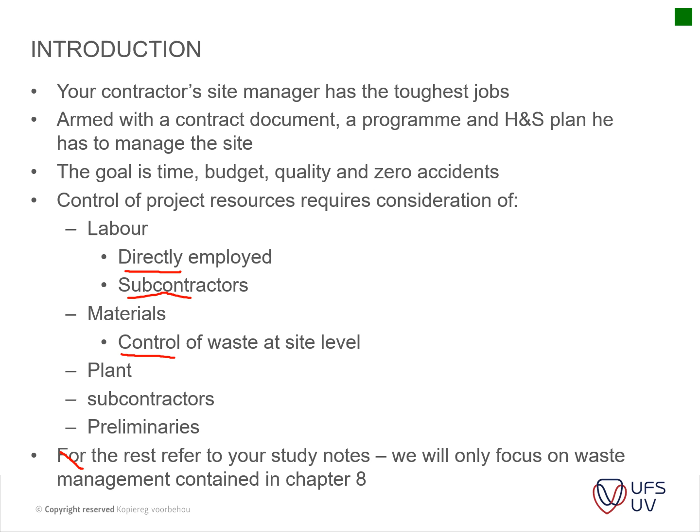So this is this little thing which I said which crept in. So please just ignore that. Yesterday when I updated the notes, I saw that this was in. So that's just something that crept in.

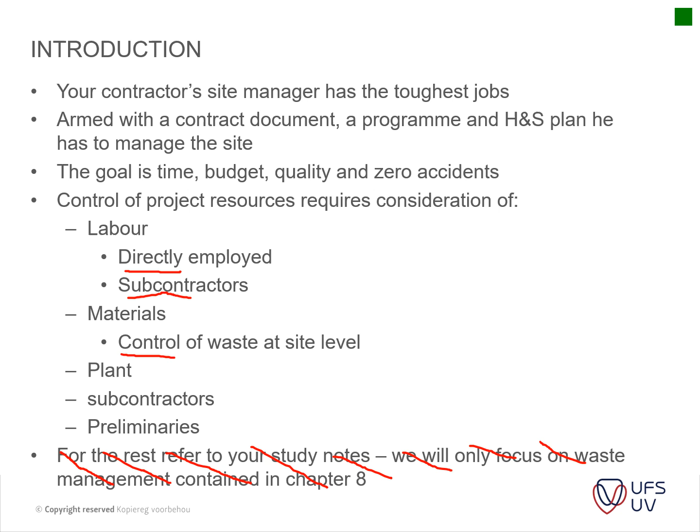Okay, so labor control. Like I said, you can either have directly employed labor or you can have self-employed labor. In South Africa, it's not really self-employed labor, I think we've got a different term. We usually use labor-only contractors, guys that specialize in labor, which has the necessary insurance and have their medicals updated.

UIF and all those items they look at, because you can imagine if you've got one or two projects and you suddenly have 100 people that you need to appoint, and then what do you do with them once the project is done? So that's where the labor only comes in.

But your directly employed labor is usually the contractor, contractors like shop fitters and so on. They have specialized guys that do the work for them. For instance, that tender briefing we went to, like tilers, plasterers, many of the contractors will have that type of core staff on their list, the artisans and bricklayers or so.

And what they might do is get a couple of casuals or people for that specific project to assist those artisans, guys that carry the bricks up to them or so. It depends on the size of the contractor as well, and the location. For instance, if you're a contractor in Joburg and you get appointed here in Bloemfontein, you might appoint a bricklayer from Bloemfontein just for the project, or a labor-only contract for that.

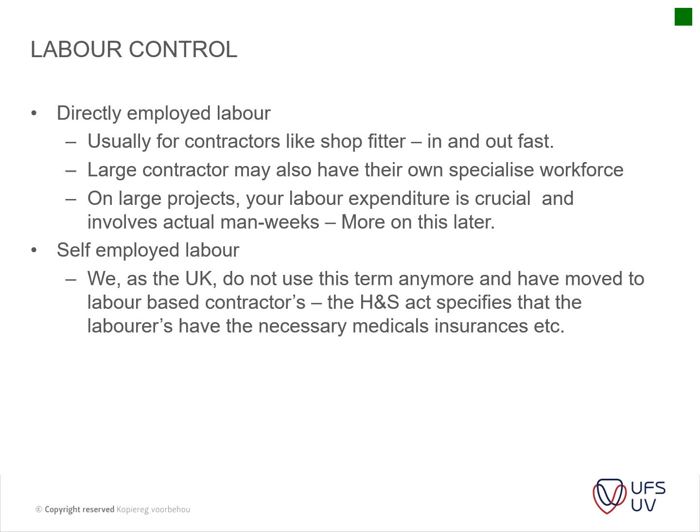So please note that. Then self-employed labor - in the book, as the UK does, we do not use that term anymore and have moved to labor-based contractors, like I said earlier.

Okay, so resource histograms - this you did in PPM, so I'm not going to go into too much depth of how your labor histograms work. But there's an example in this book that I might post as a mini task for you guys to do. Don't worry, I won't do it now. I'll just check with you guys when you have a bit of time.

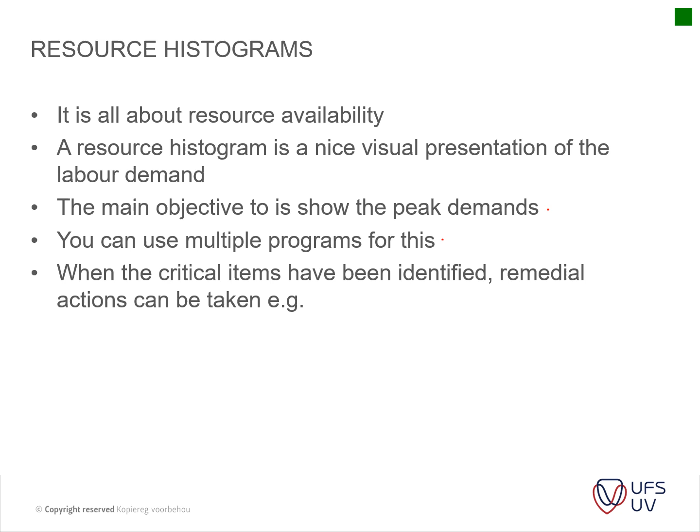Okay, so this one you'll probably recognize. This is from PPM from third year. I don't know if it looks familiar. It's a very simple histogram. So it's a simple project where you have excavations, bedding, lay pipes, manhole excavations, manhole construction, install valves, backfill, test and commissioning. So it's a very simple little project.

But this is now your labor only histogram. Okay, so you need 2 laborers in your teams that you can put on for trench excavation. So you've got 2 people that can work simultaneously in the trench. Your bedding, you can put in 4 people to work on that, and it takes them about 1 day.

And then you've got your manhole excavations. You need about this amount of people. Laying of pipes, you need 3 people to do that. And then you've got your manhole construction where you need 6 people, and so forth. Okay, so all it does is this is done on an Excel spreadsheet, and then you just add up the amount of people that you need per day.

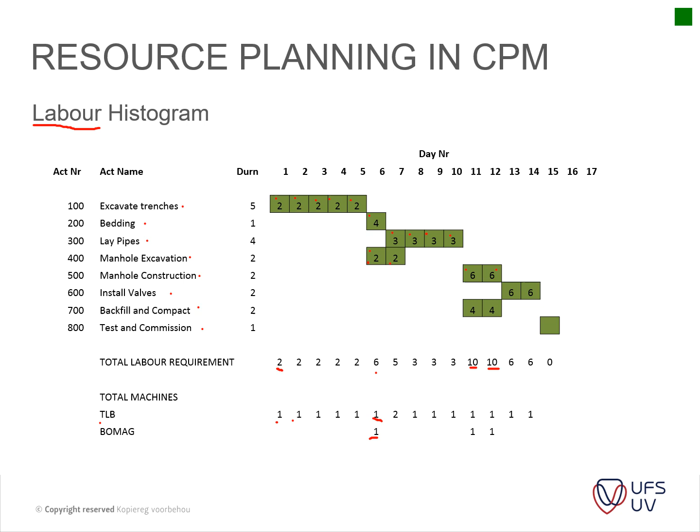Okay, so on your labor histogram you can see we've got these 2 extremities here, but we know we only have 8 laborers available, so there's already too many laborers on that day, so you can see you need to do a resource leveling there.

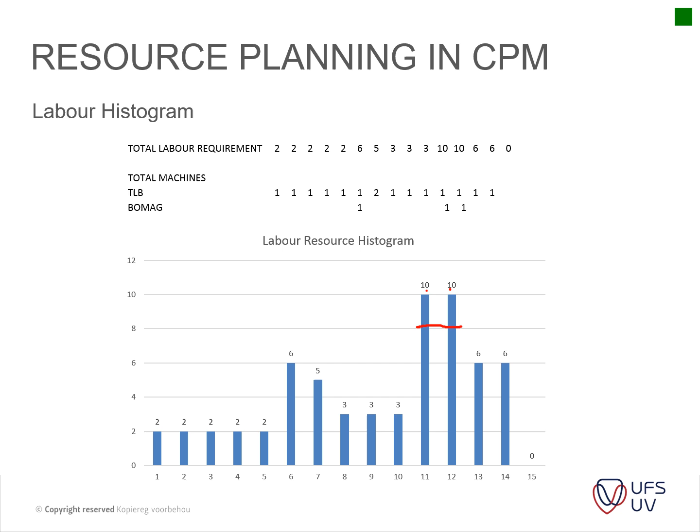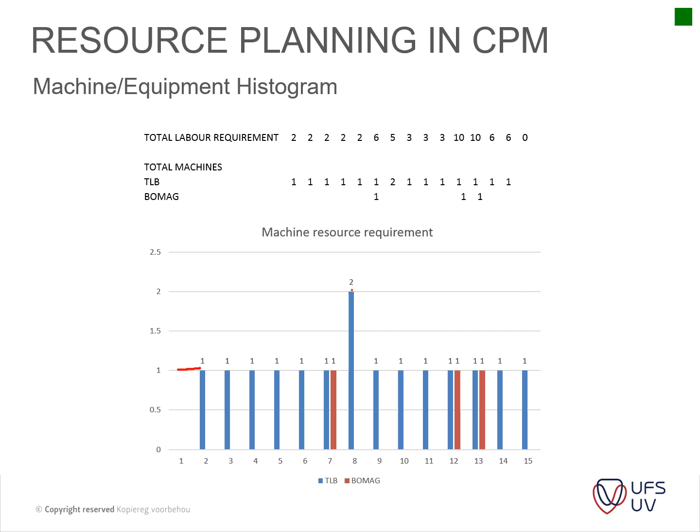Okay, then with regard to the TLB, the same applies. You add it up, and you can see on which days you need what amount of machinery, and you can see on day 8 you actually need 2 TLBs, but you only have 1 available. Okay, so you can easily identify where you don't have enough resources.

Okay, and then the simple solution, without going into too much depth, is you just level out your resources and your TLBs. What it causes, I think it's the pipe laying, that just moves out one day, together with your excavations, which moves the project by 1 day if you level it to 1, and if you level your laborers to 8, like there.

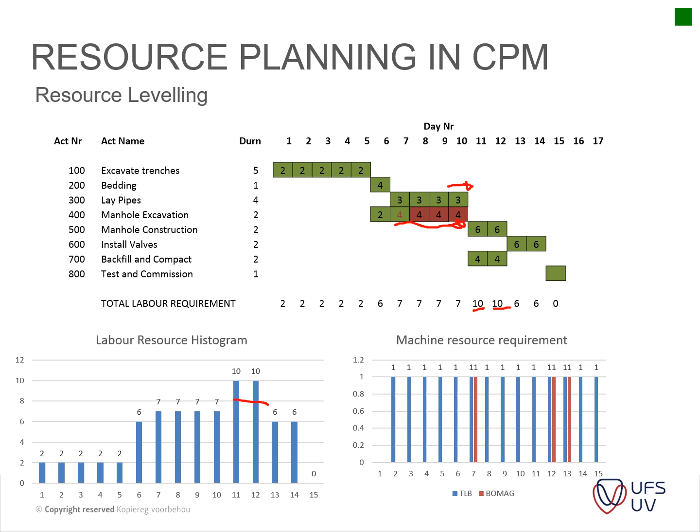I just want to see why it's still adding that up. Okay, so that's just a bit of a recap of how histograms work. And going further in materials control, that is on page 401.

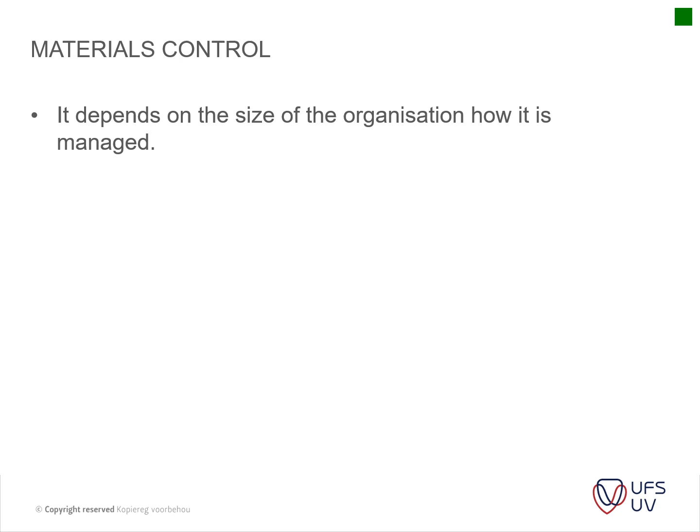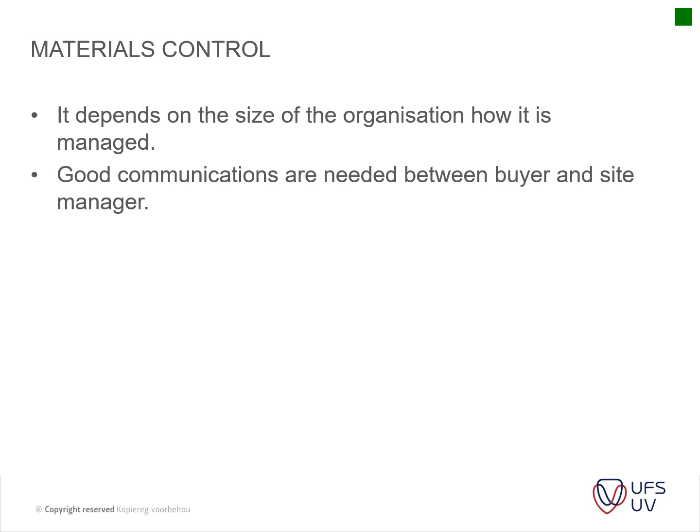Okay, it depends on the size of the organization how materials are managed, whether you've got a buyer, a central buying division, or if one person does everything. Good communications are needed between buyers and site personnel. That's very crucial. And then the responsibilities have to be clearly defined. Once on site, it's the responsibility of the construction manager to coordinate the communication. So that's something important to note.

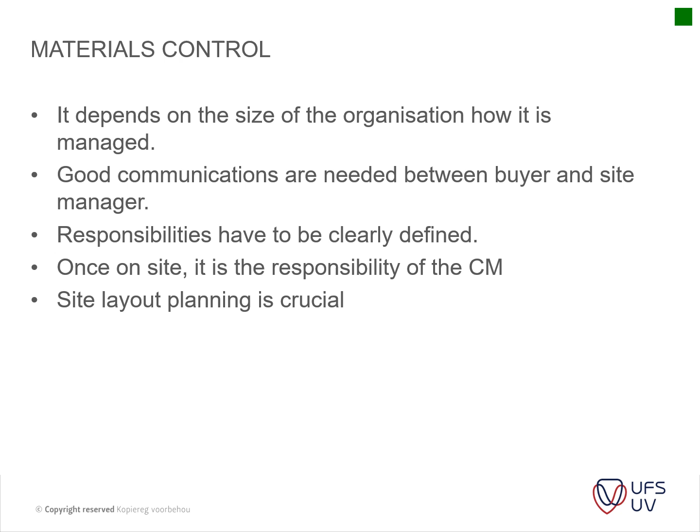And then site layout planning is crucial. That's where you're going to put your plant, where you're going to store your materials. And I think it's one of my next slides. If your housekeeping on site is done well, if you come onto a site and you see everything is nice and neat, you know they're managing their materials well. If you come onto site and you're falling over debris and bricks, broken bricks and so on, you know that they're not managing their materials very well.

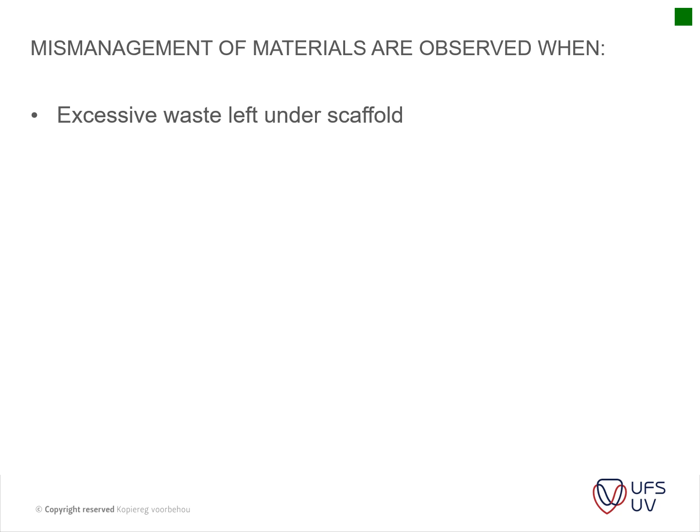Okay, excessive waste left under scaffolding. Here's actually the items which you can see. This is just a few examples. What you can see is excessive waste under scaffold, face brick bulldozed underground, material being stored on uneven ground, pallets of bricks unloaded on unprepared ground. This is supposed to be on.

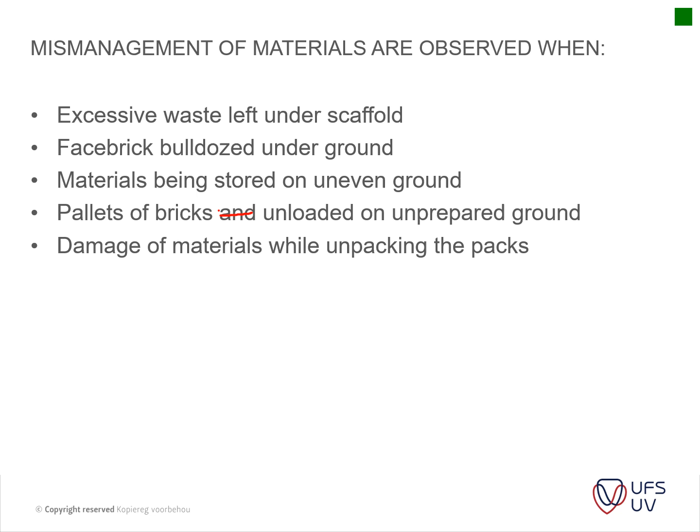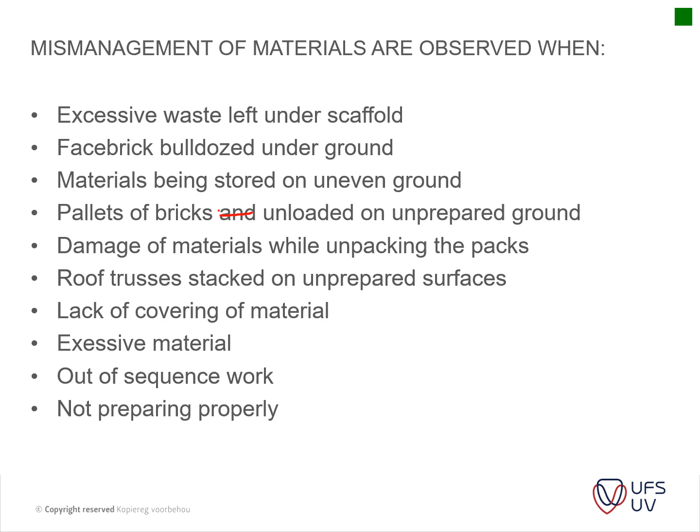Okay, and then damage of materials while unpacking the packs, roof trusses stacked on unprepared surfaces, lack of covering of material, excessive material, out of sequence work, not preparing properly. So you can easily see when a site is not properly run, especially towards managing of materials. Okay, then

something which embroiders on that is waste. Historically, material waste was only a percentage on top of your rates, but these days those percentages, if you're working on large projects, can be a lot of money in your pocket or a lot of money lost. So it is something that you need to manage very well. New thinking suggests seeing it as a resource. The industry can benefit environmentally, on performance and the bottom line.

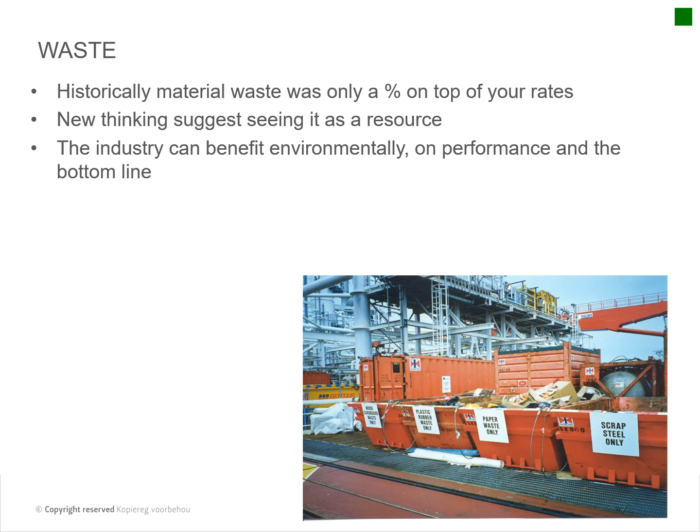Demolitions amount to about 100 million tons per year. That's now in the UK, so it's quite a lot. And then waste removal accounts for 4.5% of the company's profit. So just to put it into perspective, 4.5% is quite a lot. If you're working on a million rands worth of project, that's more or less 45,000 rand, which you could have saved or put into your pocket. So yeah, it's a lot of money.

Then approximately 13% of all material delivered to site is wasted. That's quite a staggering amount. And that's just the waste of material. There's other items which you can manage well as well, like your site offices. If you manage your tools and sheds and so on efficiently, the less containers you have on site, the less your overheads per day. So that's the stuff that you can think about.

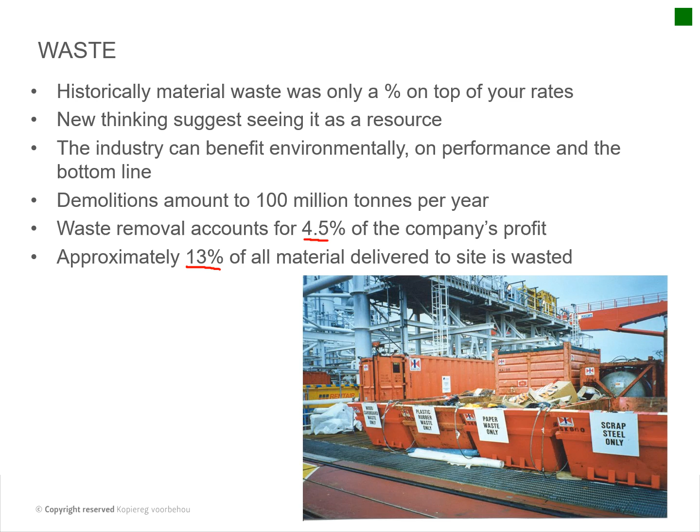The other thing is if you plan your site such that you use some of your originally constructed building to be used as storage, you can save that cost as well. So there's a whole lot of practical items that you can think of to save money by utilizing your progress on site and just being effective.

Okay, duty of care: construction and demolition waste streams have been prioritized by the environmental agency. So basically once you've demolished something, you need to get it off site. You need to plan for it. That's the short and long of it. You can't just demolish something and not have a plan of how to clean your site. Waste streams should be managed safely and without risk to human health. Okay, and then the waste may consist of metals, asphalt, tar, concrete, brick, tiles, etc.

Okay, and there's actually money to be made out of some of these demolitions. Sometimes you can sell your hard, or some of your, I can't remember what it is in English now, but some of your demolitions you can use for fill in other areas. If you've got a contractor that has a lot of fill to do and you can use that demolition work there, then you can actually sell it to them. So remember that, don't just pay money and go and dump it at the nearest site. You can actually save or make money from that.

Like for instance, your tar waste you can reuse for other applications also. I know in Kuruman they use tar sections because of the asbestos there on some of the gravel roads. They just use some of the excess bitumen and they actually made a little layer on some of those areas to rehabilitate it, so that the dust doesn't fly up. So that was one of the items that you can use that for, for instance.

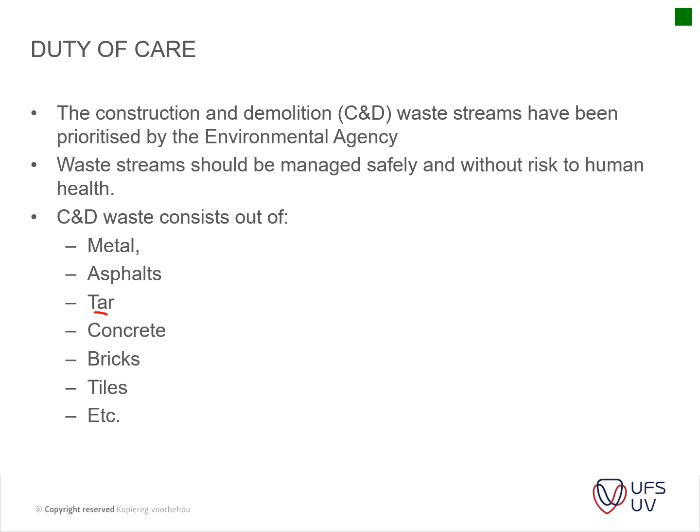Okay, duty of care. Construction and demolition waste is normally classified as commercial or industrial waste. Hazardous waste, which requires pre-consignment, is for instance your asbestos, chemicals, oils, contaminated soils, and so on. I've worked on one project where we had to take off asbestos. It's a schlep. There's only like four contractors in the country that do it, so it's highly specialized work, and they usually ask a lot of money for it.

So as soon as you're doing pricing on a project and you see there's asbestos, immediately start asking questions: is there enough money allowed for it? Identify it as a risk whenever you're pricing your documents also. Okay, then we have a legal duty of care. If we know that we're going to work with asbestos, the other risk is exposing your laborers to that.

It might not be that your personnel picks up a little strand of asbestos on that specific site, but five years down the line he gets asbestosis, and he says, oh, I worked on that project, that's probably where I got it, even though he might have got it from somewhere else. So just see it in that light. You've got a duty of care to actually look after your personnel's health.

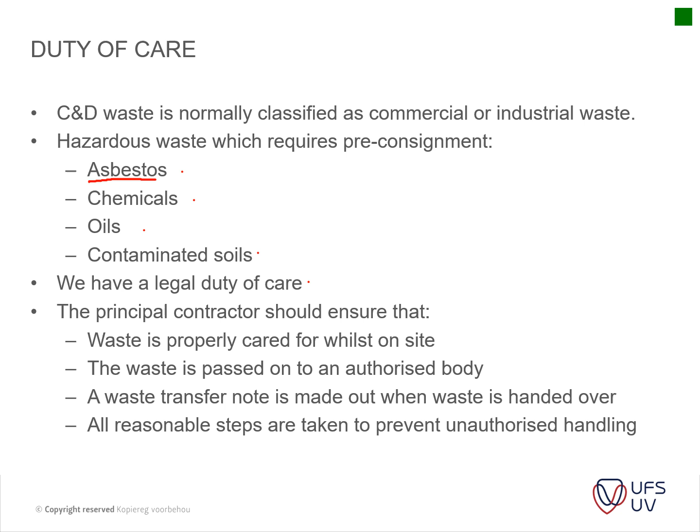Okay, then the principal contractor should ensure that waste is properly cared for whilst on site. Waste is passed on to an authorized body. A waste transfer note is to be made out when waste is handed over. All reasonable steps are taken to prevent unauthorized handling.

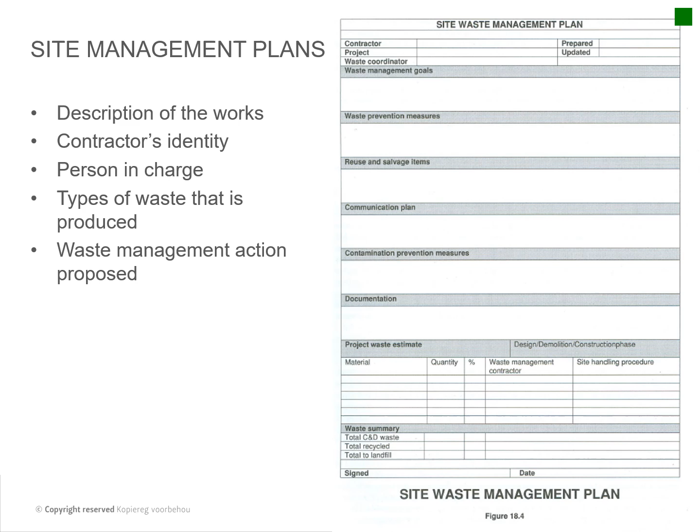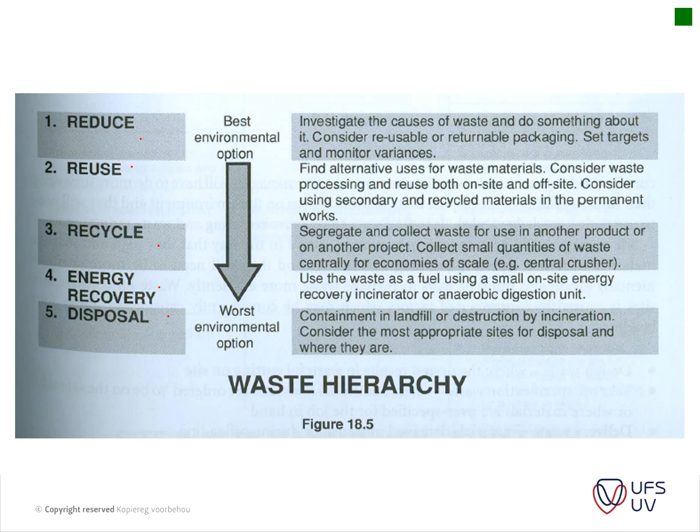Okay, site management plan. Here's a nice example that you guys can use. It's description of the works, contractor's identity, person in charge, type of waste that is produced, waste management action proposed. So pretty straightforward. Okay, a waste hierarchy. Waste can either be reduced, reused, recycled, energy recovered, or disposed of. So that's also a nice little question to ask on waste. And obviously you need to explain what each one is.

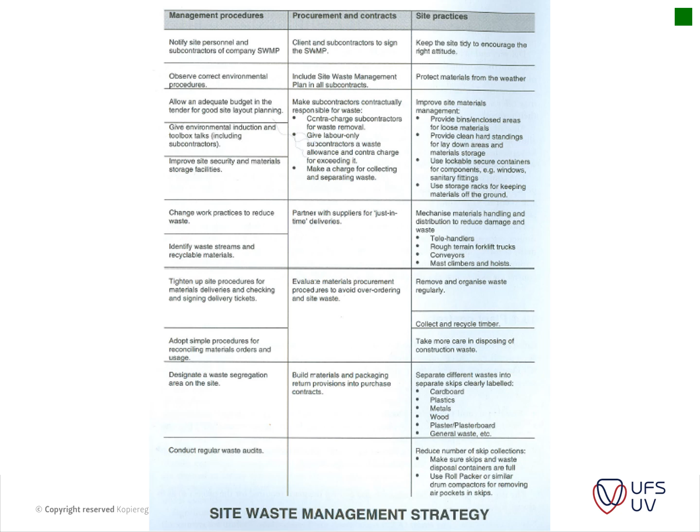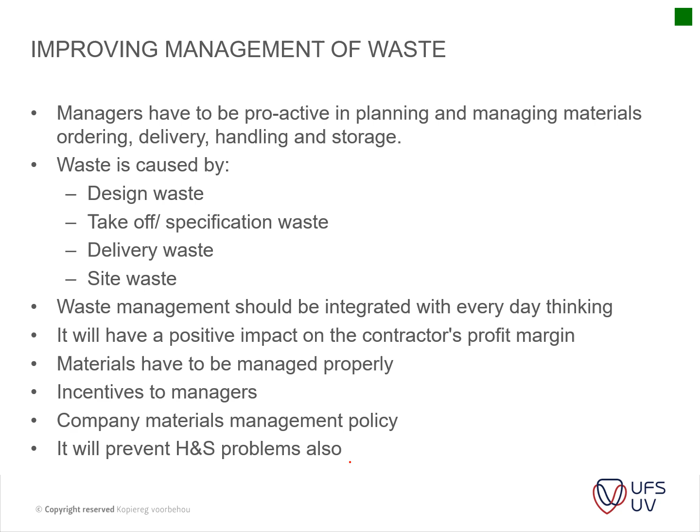Okay, then we get to subcontractors, and this is very important for me. You've got subcontractors, pre-tender planning, and then during construction contract planning. So figure 18.8 is important. It shows the relationship between your planning and your actual control on site.

So firstly, think back to our tender briefing last week Friday. Those guys will have to obtain quotes now from their suppliers, so they're at this stage, and then they need to compile the shortlist, subcontractors register, subcontractor selection criteria, obtain quotations. If it's a large company, usually those guys have to be on their vendor lists. If it's something specialized, they've got a whole lot of red tape to get quotes from other guys and get them onto their registers.

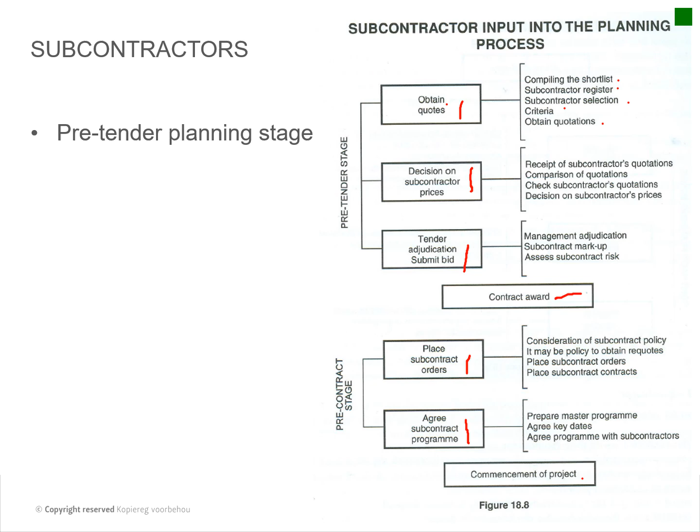This is also very important, the information contained in here. You will see in your books there's a whole lot of checklists - just read through that. But the most important items are actually contained in these figures.

Again, going back to my rule of thumb: know the headings, and then you can build on that. In Afrikaans it's 'ken jy opskrifte, gorrel die res' - but the main thing is, if you need to gorrel, you need to understand.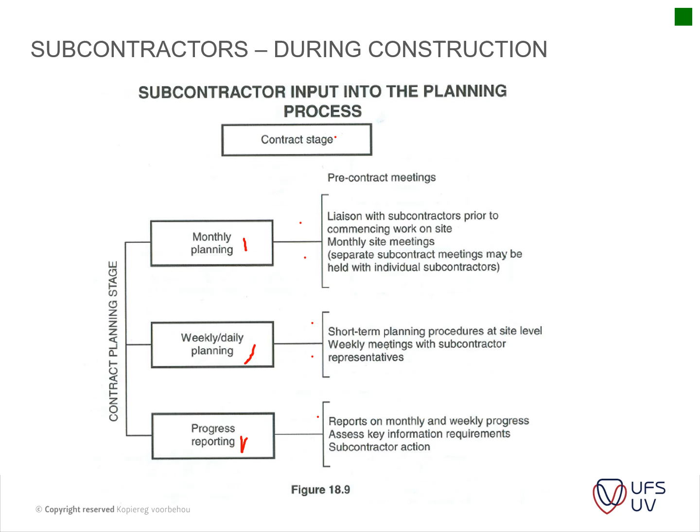Subcontractors continued. These days, subcontractors may be responsible for their own program, and they are. For instance, at Amelia where we worked, the plumbing contractors had to submit their own program, and that had to slot in underneath the main contractor's program.

Then it's a good idea to keep stock of the price, quality, and workmanship, standard of cooperation, and time, program performance of subcontractors. I've seen guys that have vendors and subcontractors actually keep a scorecard on them, and a rating, so the guys can move up and down - that's usually very confidential information, what the guys use.

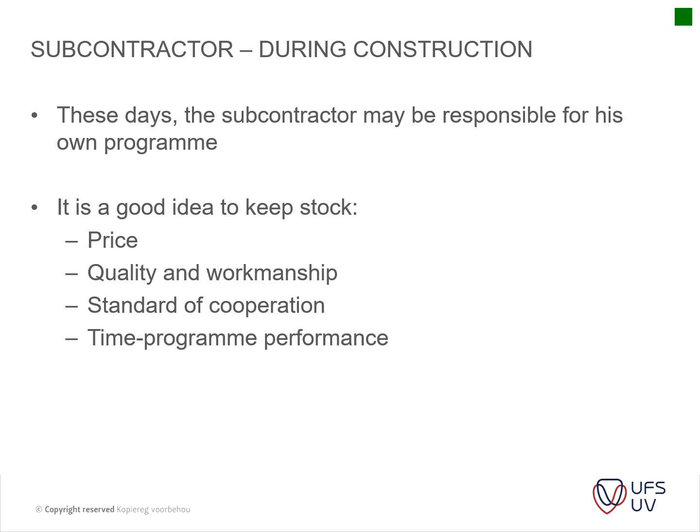It does in large companies - that's very crucial information, because if you're working on large projects and have to evaluate a lot of subcontractors, you look at their ratings for this guy in this area and so on. So it does become quite complex.

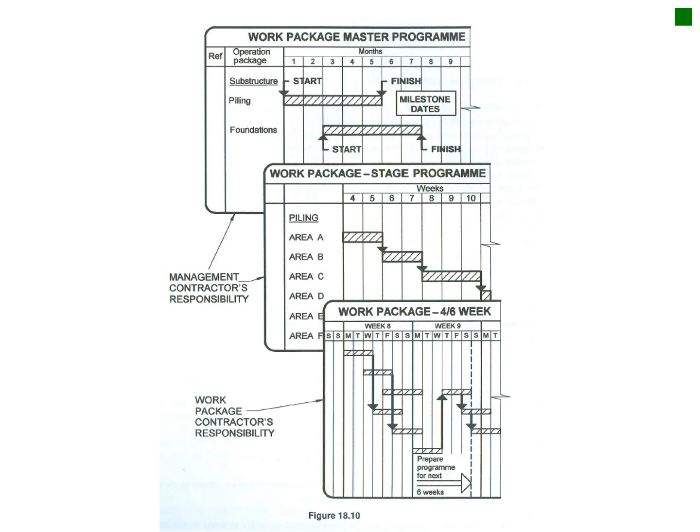Okay, and then just an example - I think we've touched on this. This is not that important for me, but you've got the work package master program, package stage program, and then a work package 4/6 week program. So it's just going into more detail - not too important for me.

What's liaison in Afrikaans? Correspondentie. What does it mean - liaison? It's basically working together. If you liaise with someone, you speak to them, you communicate, and you do stuff together.

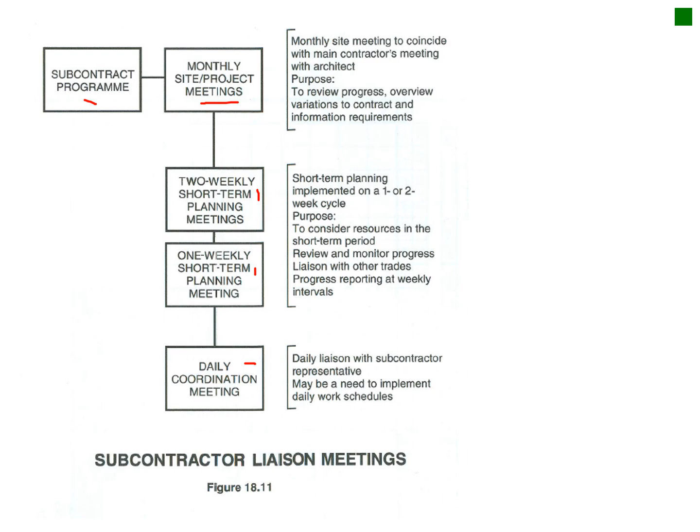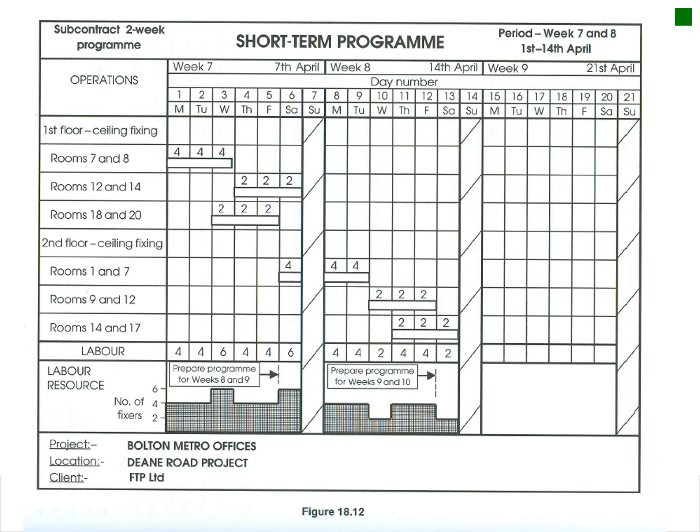Okay, then the last one is the short-term program, just another example of that - also not too important. We're going to do programming later on, next semester we're going to do programming in detail, so then we're going to cover all these areas.